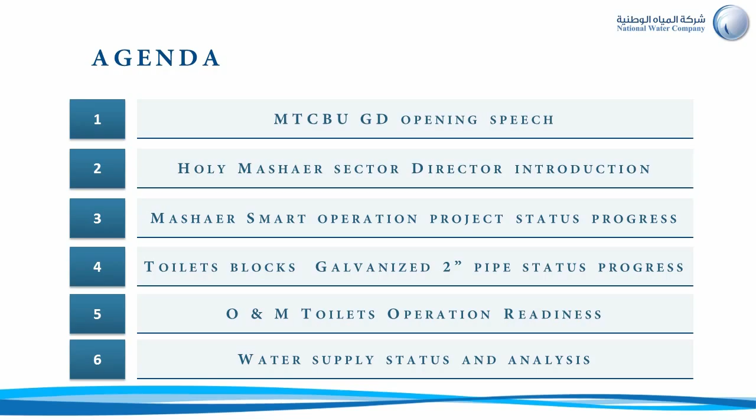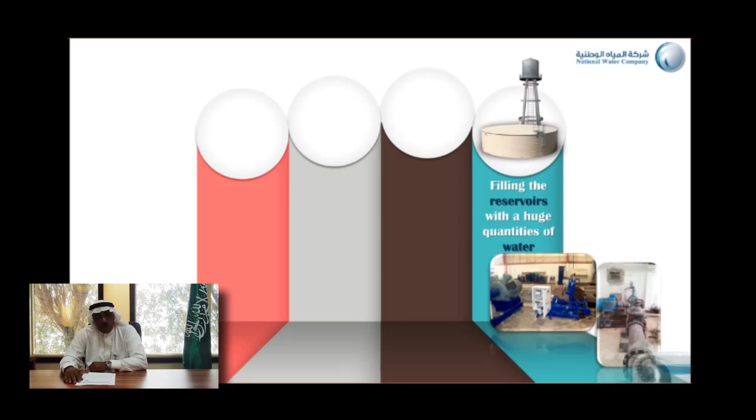Bismillah ar-Rahman ar-Rahim. In fact, we start planning for Hajj early. In other words, after each season, directly MTCBU and NWC start preparation for the next season. All this including the operation and maintenance activities, starting from maintenance of reservoirs, valves and toilet blocks, and all the components of the networks which perform good services for the pilgrims during Hajj.

Starting from 1st of Rajab, we start filling and testing cooling system networks and firefighting networks. By the end of Ramadan, we start giving all the required quantities for Mashaer for testing drinking water networks, in addition to the cooling system and firefighting network. According to the strategy of NWC to develop operation and maintenance of Mashaer sector areas, we start this year a smart operation project, which gives full automation of the network components by SCADA system.

Since last year, we started immediately with the preparation for this Hajj season. A lot of projects have been implemented after last Hajj in water, wastewater and enhancement projects related to services. We have a strategic project this year, which is the smart operation, which will give us the ultimate positive impact to serve the pilgrims.

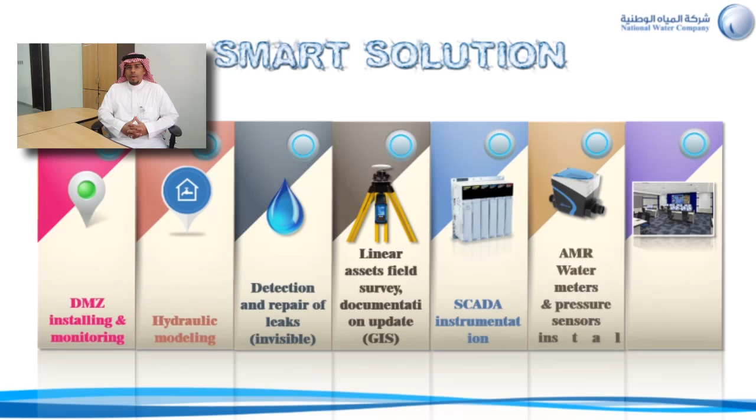In addition to that, in Mina we will have 100% coverage for all the toilet blocks to be monitored, and we monitor the pressure from the control room, and if there is any low pressure, it will be acted on immediately and automatically. This year we are changing the approach of the operation. We are changing the focus, and we are focusing to manage Al-Mashaer area, in Mina specifically, in smart operation. This smart operation will give automated functions. We will manage the critical zones this year 100% by technology. We are using smart technology in order to get high efficiency in serving the pilgrims.

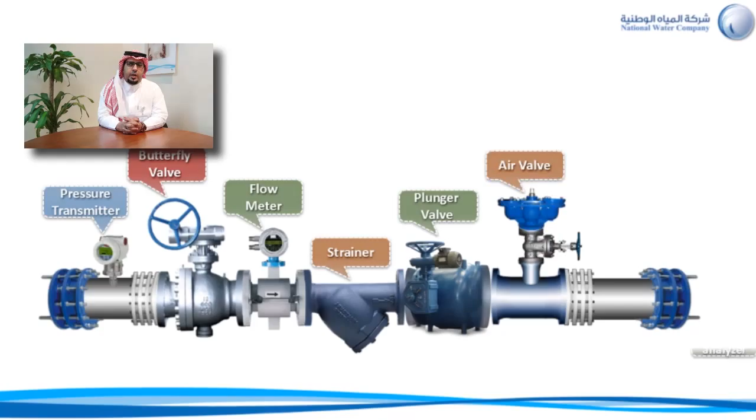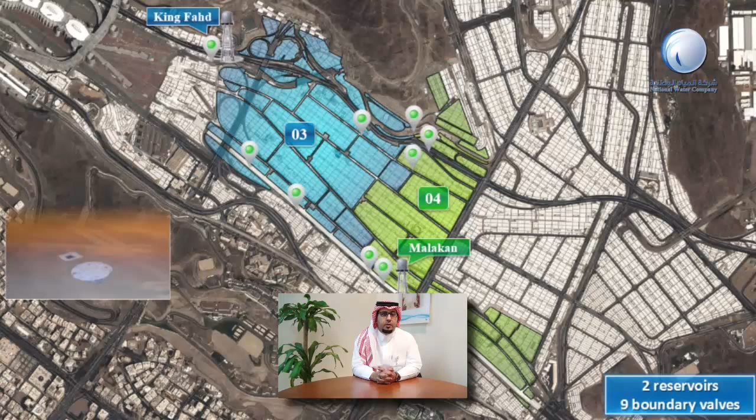In the critical zones, zone number 4 and 3, we will have 10 chambers in which we will install all the components of SCADA instrumentation, which will let us control the network, such as the motorized valves, flow meters, pressure loggers. All these components will be installed in the chambers of the boundary valves. We have 2 reservoirs, as you know, supplying zone 4 and zone 3. Also 9 boundary valves to control the DMZ of these 2 zones. So all these components will be installed, inshallah, before this Hajj season.

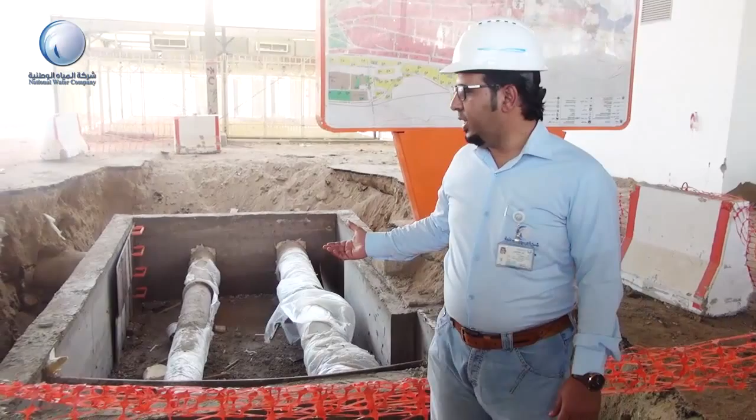The progress of these chambers: 7 chambers are already done, and we are reviewing the locations of the 3 remaining chambers, and we are mitigating all the issues we have on site. As we explained previously, this is one of the excavations that has been done, which includes 2 chambers in zone 4 and 3. This is all the civil work, as you can notice, already finished, and we will install in each chamber, as we explained, the motorized valve, the flow meters, the pressure loggers, the plunger, all the necessary equipment as per the scope of work of the project.

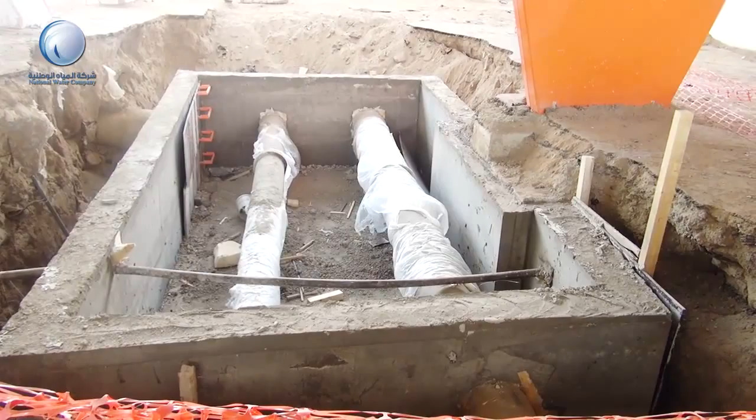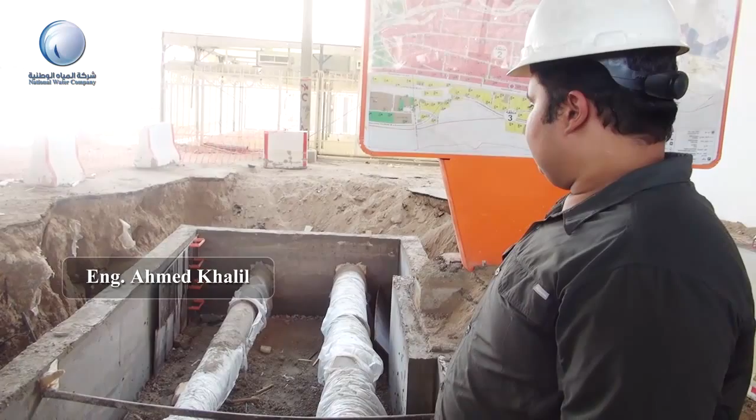During the construction of these chambers, we faced a few problems, and we mitigated the problems, as the project manager of the contractor will explain to us. As we can see here, we faced some problems with narrow dimensions between lines, so we can't construct two chambers. That's why we combined two chambers inside one chamber, but we mitigated this by increasing the wall thickness and the dimensions of the chamber, to enable us to start installation and to finalize the installation of instrumentation in a good way, inshallah.

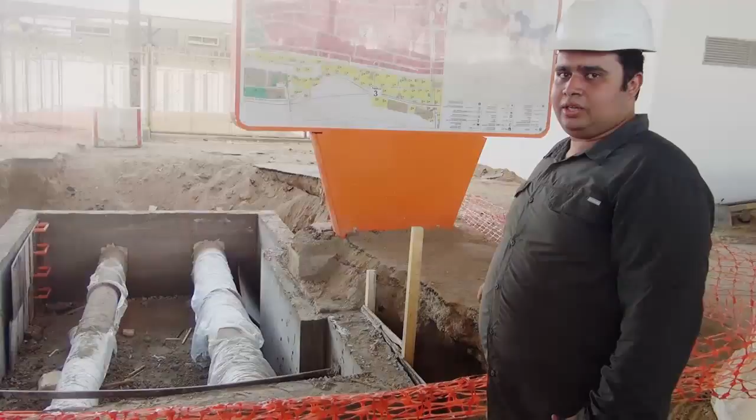As we explained previously, in the Smart Operation Project we have a major part which is the leak detection works and activities. We are implementing various types of leak detection techniques such as ground microphones, correlators and helium gas technology. Now we already have our leakage detection specialist from the project team, and he will explain to us the technology and how it will work.

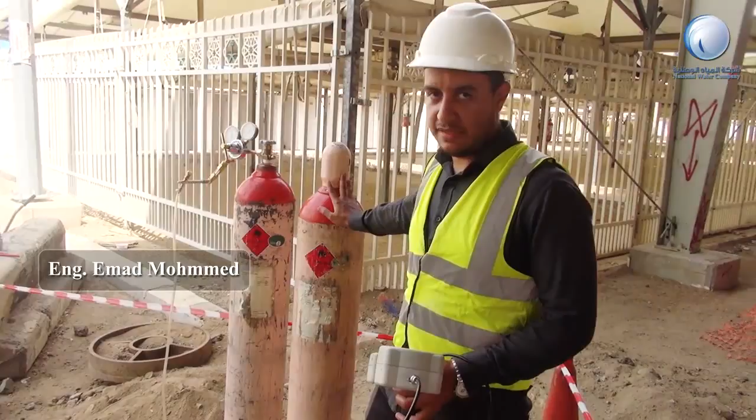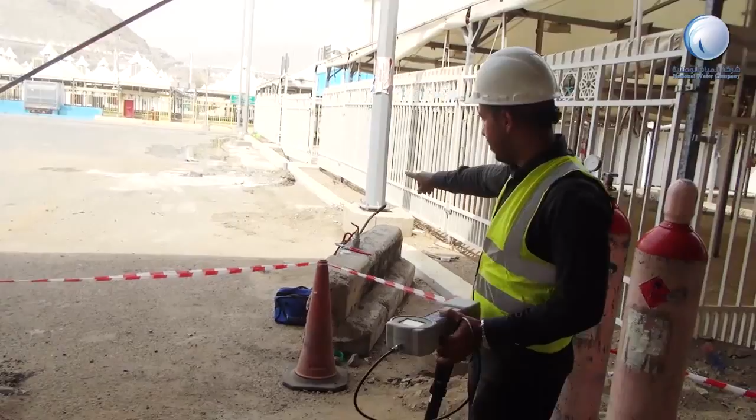Right now we're injecting helium gas inside the line and making holes in the soil so the gas will come up. Helium gas is seven times lighter than air, so it comes out of the soil from the holes we made. This gas is totally safe and usable over long distances. Now we'll try to measure the helium coming out.

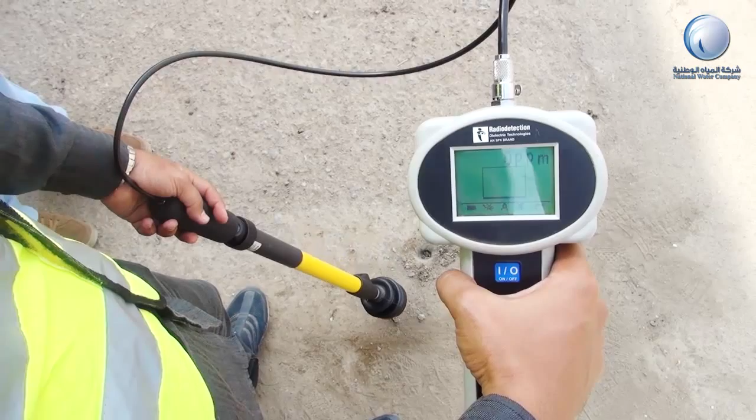Right now, the percentage is 0. There is no helium coming out of the line. If there is any leak, there should be a percentage right here on the screen. That's the percentage of the helium coming out, in ppm.

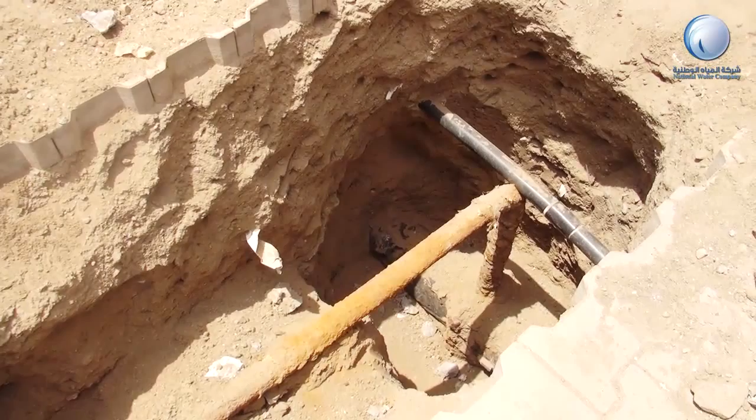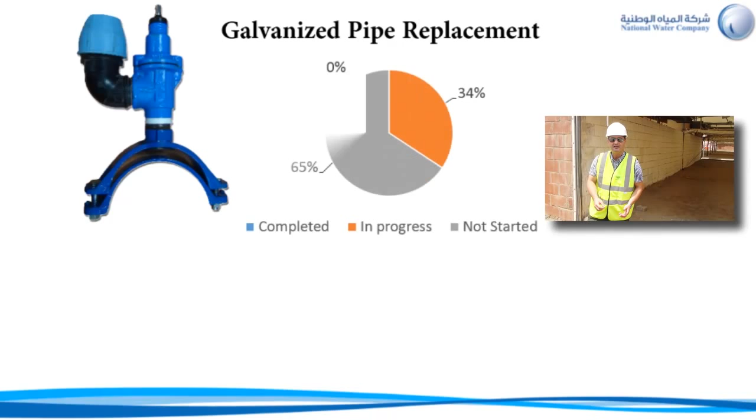Here, we are replacing the 2-inch galvanized pipe feeding the toilet block. This pipe is in bad condition, and we had a lot of complaints related to these pipes during last Hajj with leakages and breakages. We are replacing these pipes with a new high density polyethylene pipe, and we will install on this main line a collar or clips with a valve in order to close and open the valve

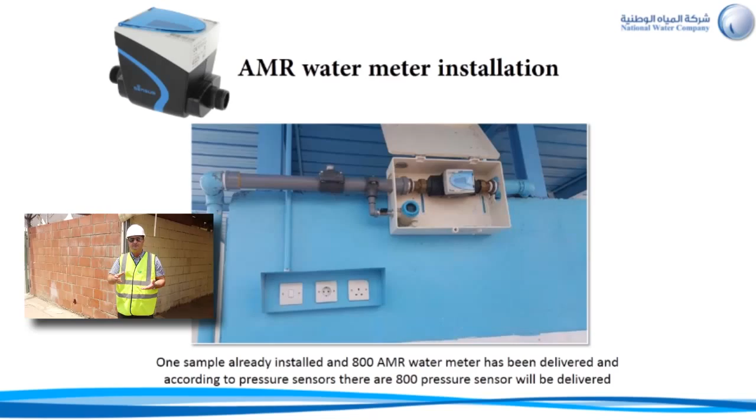as per our needs. On the same toilet block, we will install within the Smart Operation Project the pressure logger and the AMR. The automatic meter reading will allow us to follow and monitor the flow continuously during Hajj days and estimate and calculate the consumption of the toilet block.

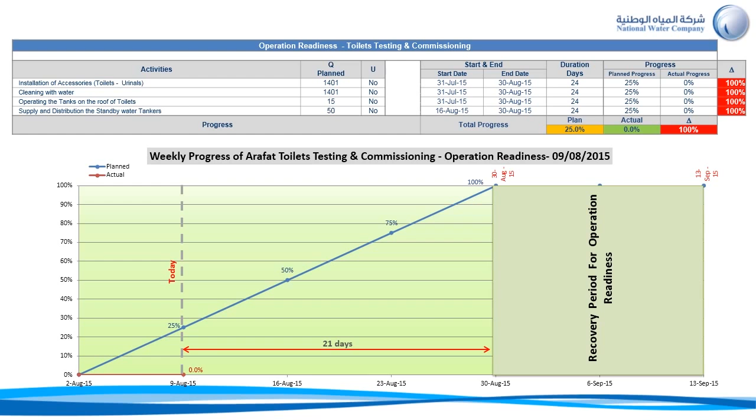The pressure logger will also allow us during Hajj days to follow the pressure and the water supply to the toilet in order to be ready and proactive in case of a shortage of water. The O&M progress of the toilet blocks follows the roadmap of the O&M activities. We started the wet processes from 15 Shawwal up to 15 Dhul Qa'dah, and we are now in the middle of this period.

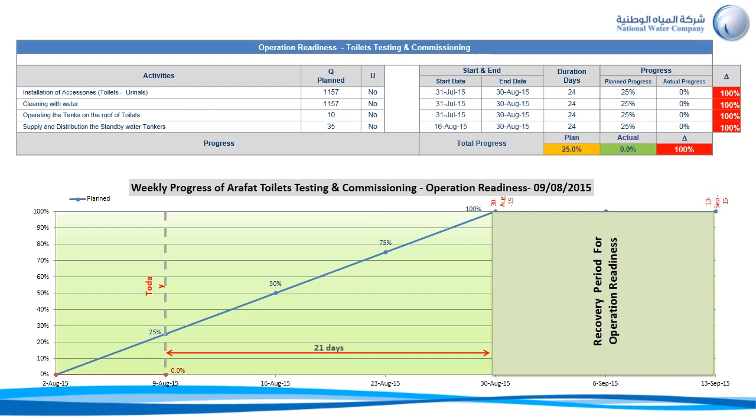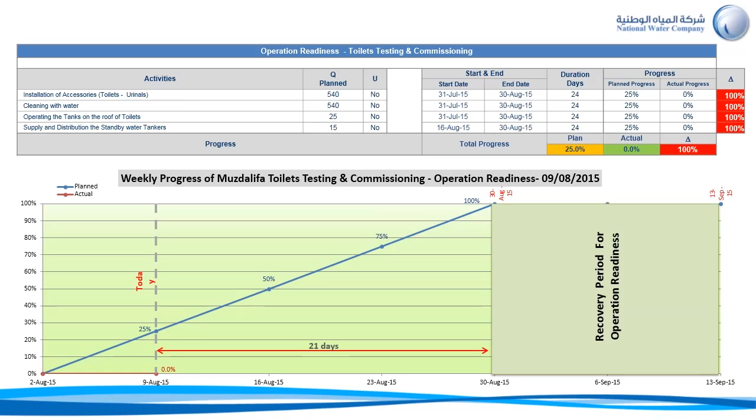We are working according to the plan, but we still have some delays, and we are trying our best to mitigate all these delays, and inshallah in the recovery period, which starts from 15 Dhul Qa'dah up to 1st of Dhul Hijjah, we are sure that we will recover all the actions required to ensure the readiness of the operation. I'm speaking about the Hajj 1436 water supply plan for Makkah and Mashaer.

I have 5 slides in the presentation. The first one is the comprehensive plan as an executive summary with the objectives, KPIs and status for each period. We distinguish 3 periods. The first period is the Hajj preparation from 1st of Shawwal to 29 of Dhul Qa'dah.

The second period is the 1st of Dhul Hijjah to 6th of Dhul Hijjah, which are critical days for the supplies of Mashaer and Makkah city. And from 6th of Dhul Hijjah to 13th of Dhul Hijjah, it is the Hajj, where the pilgrims are in the Mashaer zone and where the supply is focused on Mashaer.

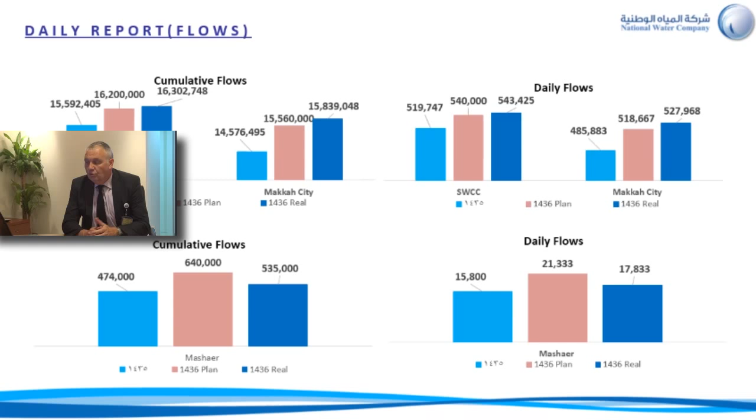The second slide is the daily status of cumulative flows. You have as of today the plan and the real cumulative flow from SWCC to Makkah city, cumulative and daily. You also have the flows from Makkah to Mashaer, cumulative and daily. You can see that from SWCC we are above the plan. For Mashaer, we are a little bit below the plan.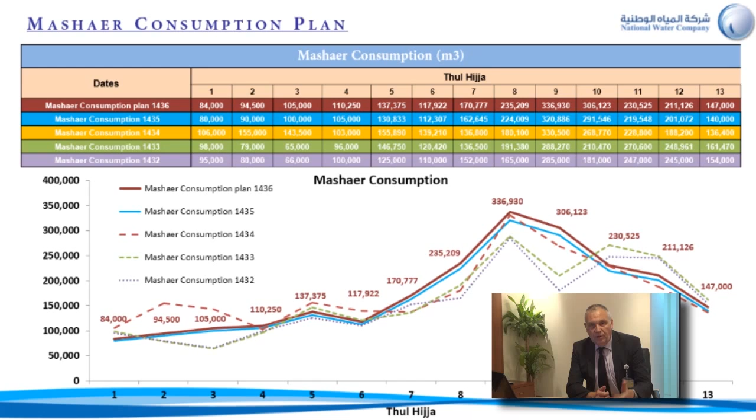We took data from 4 years ago, and we elaborated the plan with this data. So you can see the curve, and we now have reliable data for this period, taking into account different parameters, last year's consumption, but also last year's actions. It means that in the past we had some leaks which are now repaired, and the network is now much better.